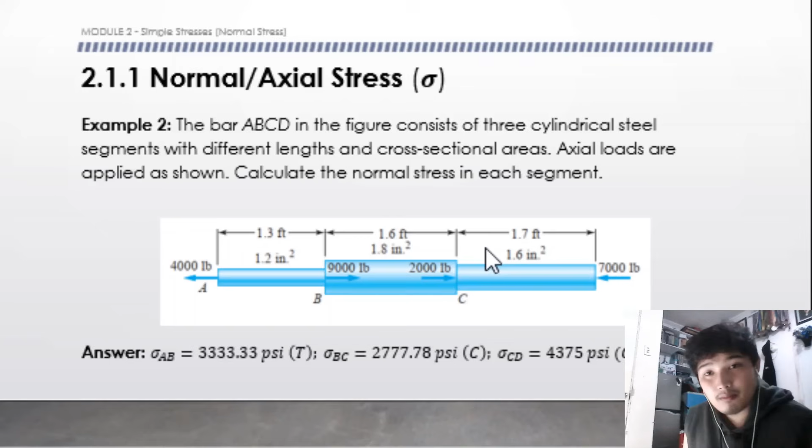Hi guys! So last time, we solved this problem using two possible solutions. The first is by cutting a section per segment, and the second is using the axial force diagram. So for the next problem, let's utilize the alternative solution, the axial force diagram.

Problem number 3. The cross-sectional area of bar ABCD is 600 mm squared. Determine the maximum normal stress in the bar.

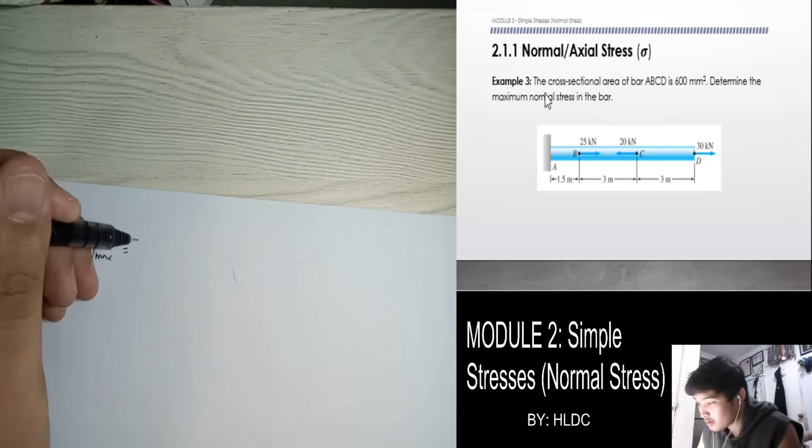Take note that the formula for normal stress is just force over area. Since at every cutting section the area is the same, that area is constant. So when does this normal stress become maximum? It's when we find the maximum normal force, given that the area is constant based on the problem.

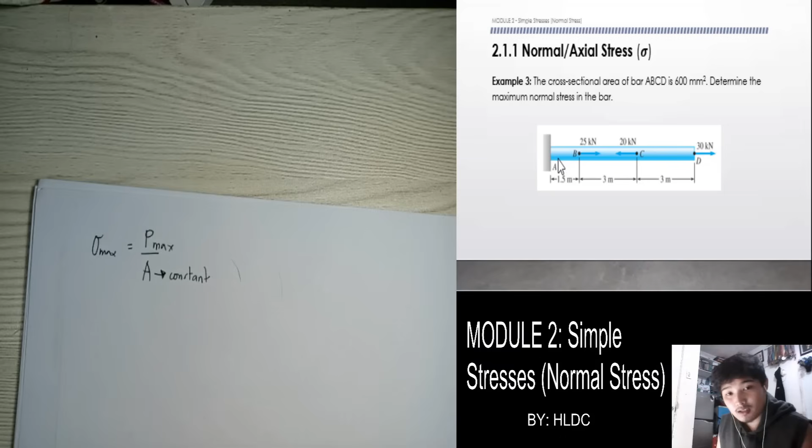So this is fixed. And then at B, there's 25.

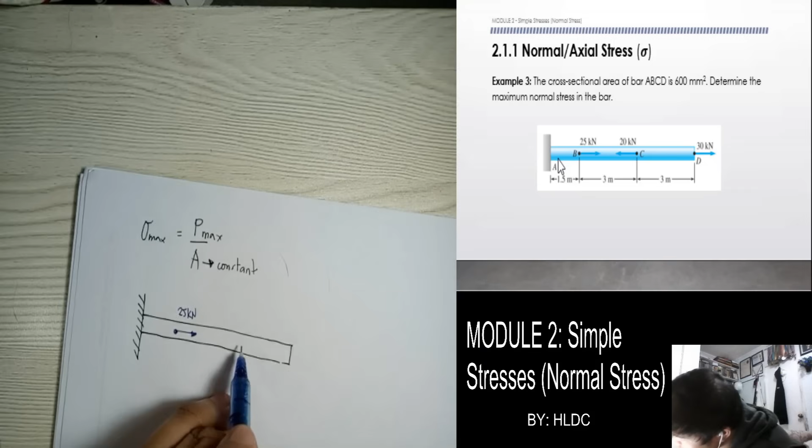Okay, so that's the given. The lengths there aren't too important since they're not part of our formula. Anyway, this is A, B, C, D. So our aim, class, is to locate this maximum force.

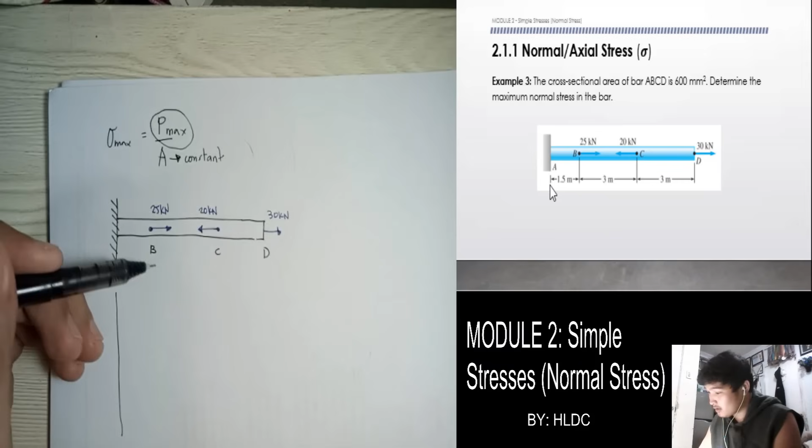So how do we use the axial force diagram again? We create a vertical line at every point where there are external forces, and then we create a horizontal line, our neutral line, at 0.

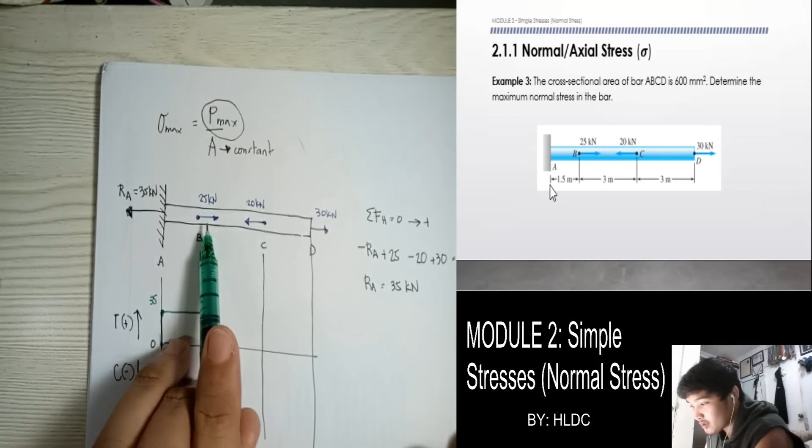From A to B, there's no force, so it's constant. Then at B, there's a 25 kN force, which is opposite to our first tension force going up, so this one goes down since it's the opposite direction. So from 35, it goes down by 25, which is 35 minus 25, that is 10.

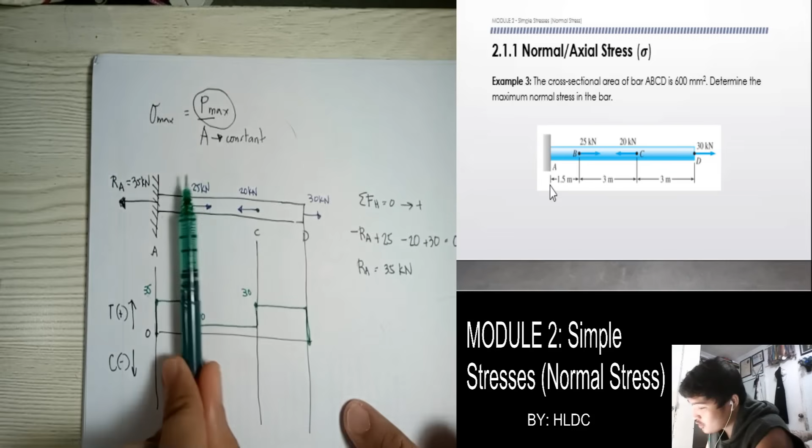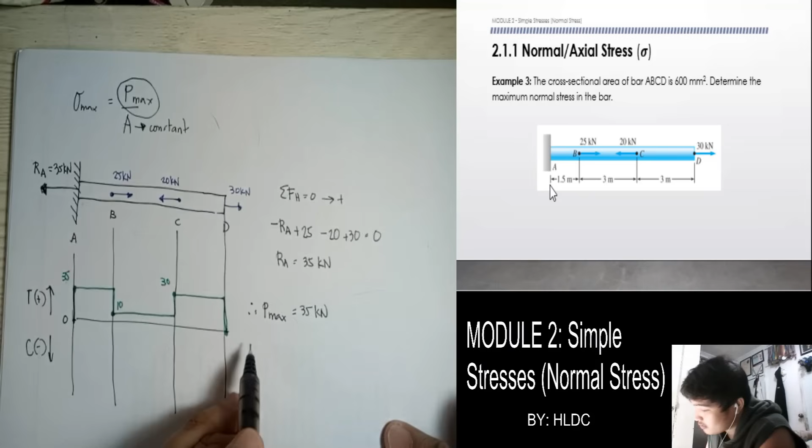Yeah, that is using the axial force diagram.

So what's being asked is the maximum normal stress. So solving for max stress, P max over the constant area, that is 35 — I'll make it 35,000 Newton so the final answer is in MPa — over area.

What's the area of the bar? 600 mm squared. So therefore the answer is 58.33. The unit is Newton per mm squared, so that is MPa. That's the final answer.

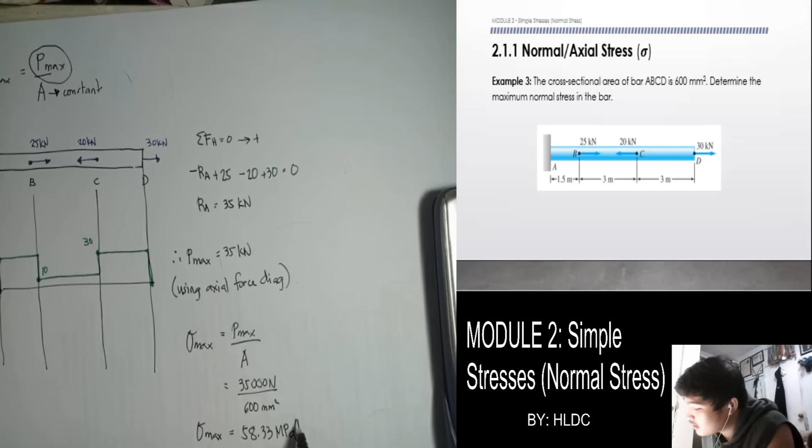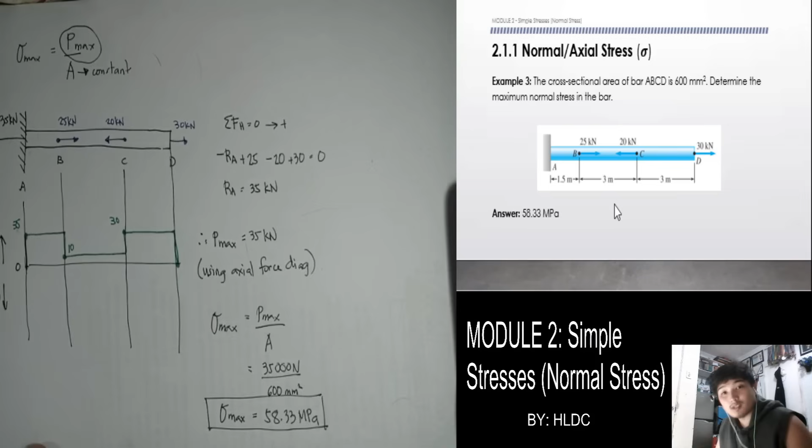Okay, let's check it. Okay, so it's correct. Next.

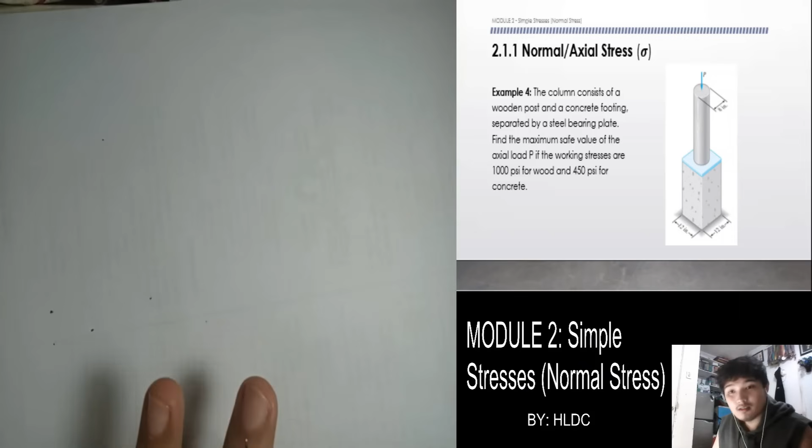Sabi dito, the column consists of a wooden post and a concrete footing separated by a steel bearing plate. Find the maximum safe value of axial load P if the working stresses are 1000 psi for wood and 450 psi for concrete.

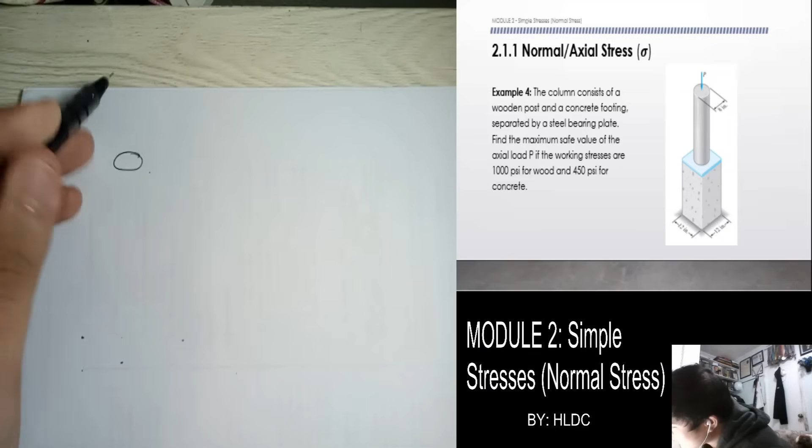Tinatanong ko ano daw yung kayang i-carry lang na load P, combined system na to ng wood sa concrete.

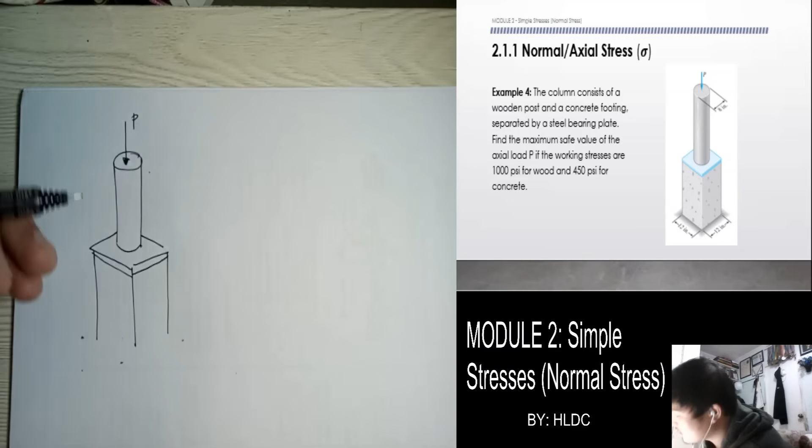So andito yung force P na hinahanap. And then given ang dimension, ito is diameter is 8 inch. Dito naman is 12 inch by 12 inch.

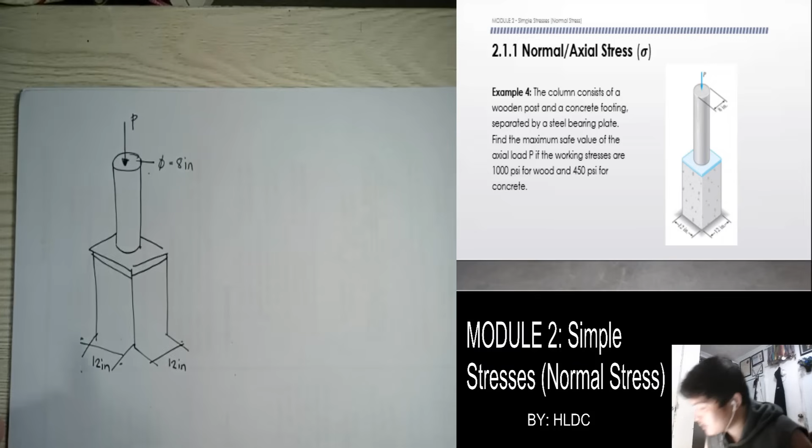Tapos given din yung mga allowable stresses nila or working stresses. So itong wood, ang limiting stress niya is 1,000. And then itong concrete, 450.

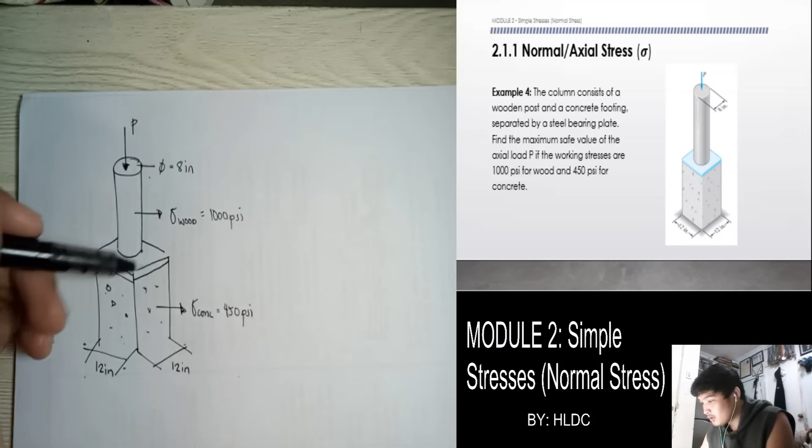Okay, so pag tinignan natin yung figure dito, kung ano yung force P na i-carry ng wood, yun din yung force P na matatransfer dito sa concrete. So, ang gawin natin class, kunin natin yung limiting force na kayang i-carry ng wood, tapos kunin natin yung limiting force na kayang i-carry ng concrete.

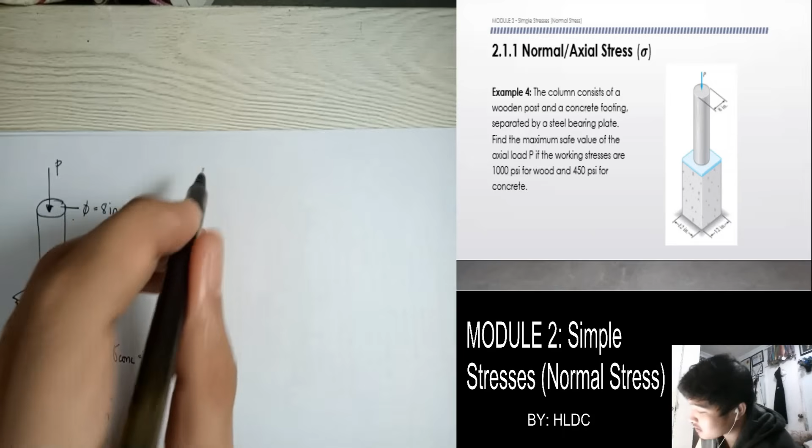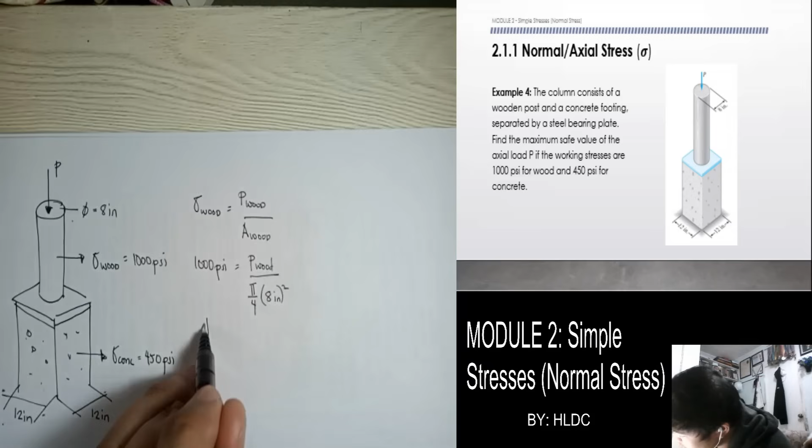To do that, gamit lang tayo ng formula ng normal stress. That normal stress for wood equals sa P ng wood over area ng wood. That is 1000 PSI, so kung PSI unit, dapat ito is pound over inch squared. So P wood over the area niya, 8 inch, so that is pi over 4 times d squared, 8 inch squared. So yung P na kaya lang i-carry ng wood is what?

So sagot is 50,265.48 pounds. Hanggang dyan lang kaya ng wood na carry na P.

How about naman si concrete? Stress concrete equals sa P concrete over area naman ng concrete. Yung limiting stress naman niya is 450 equals P over area naman ng concrete, yung 12 inch by 12 inch. So ang kayang i-carry ng concrete na force P is...

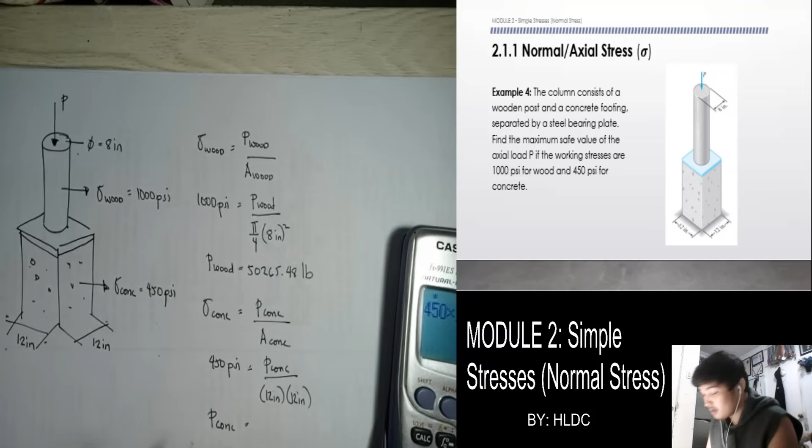Ayan, ang sagot is 64,800 pounds. Okay, so ang tinatanong dito class is yung maximum P, or safe P, I mean.

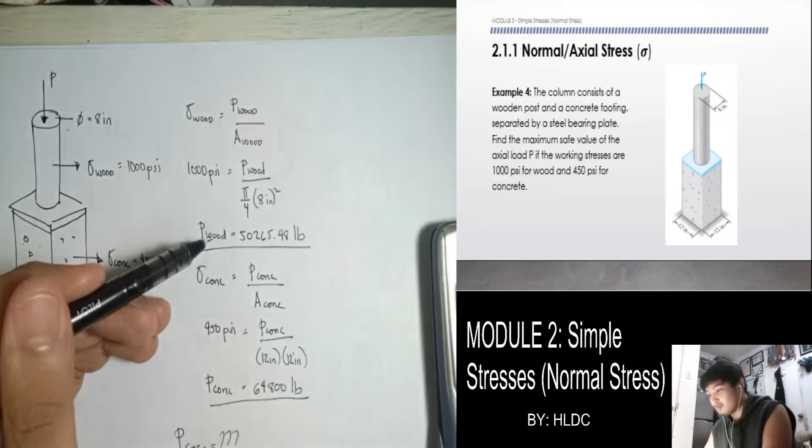So P safe. Okay, yun yung tinatanong. So sino ba yun? Yung sa dalawa, ito kasi kayang i-carry ng wood, ito naman yung kayang i-carry ng concrete. Ang tinatanong is P safe. So technically, pag sinabi mong safe, ibig sabihin dapat yung system mo hindi siya mag-fail kapag ilagay mo yung force P na yun. So para maging safe siya, dapat yung pipiliin natin yung pinakamaliit dito sa dalawa.

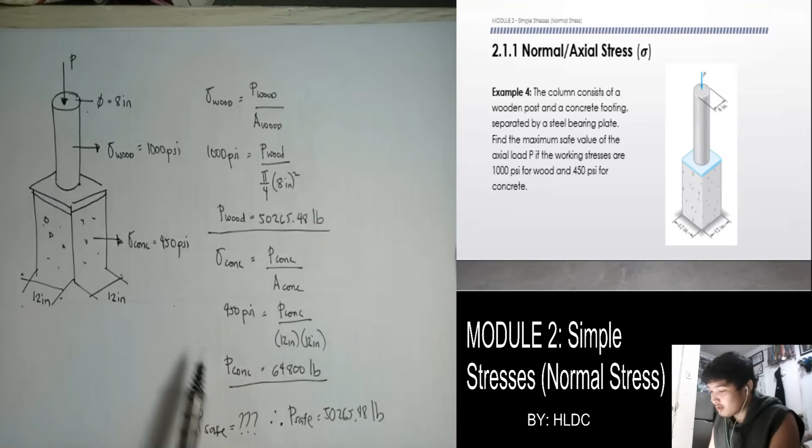Okay, so therefore, P safe equals 50,265.48. Para mangyari, kung ito pipiliin natin, yung wood, ma-attain niya lang yung maximum allowable stress niya na 1,000. Tapos ito, hindi siya aabot dito kasi hanggang 64,000 yung kaya niyang i-carry. 50 lang yung pinadala natin.

So hindi magpifail yung system. So ito na yung sagot. Madali lang siya. Next.

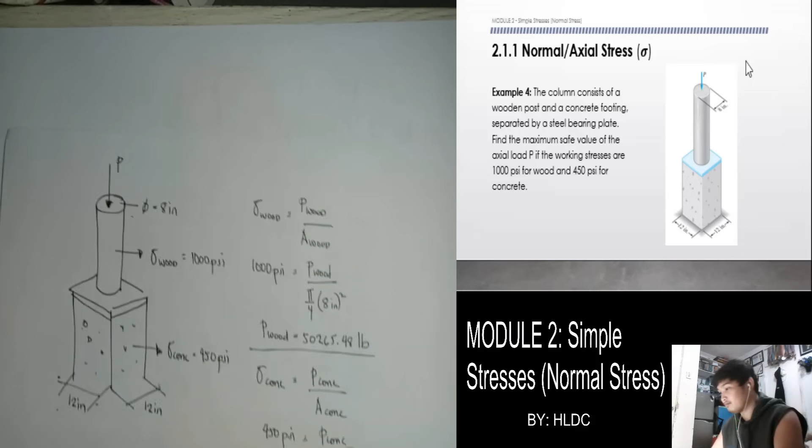Ayan, so tama. Sagot 50265. Next.

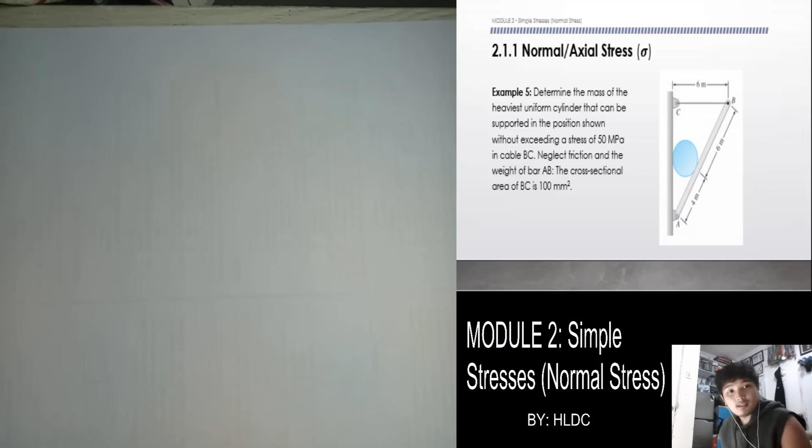Determine the mass of the heaviest uniform cylinder that can be supported in the position shown without exceeding a stress of 50 MPa in cable BC. Neglect friction and the weight of the bar AB. The cross-sectional area of BC is 100.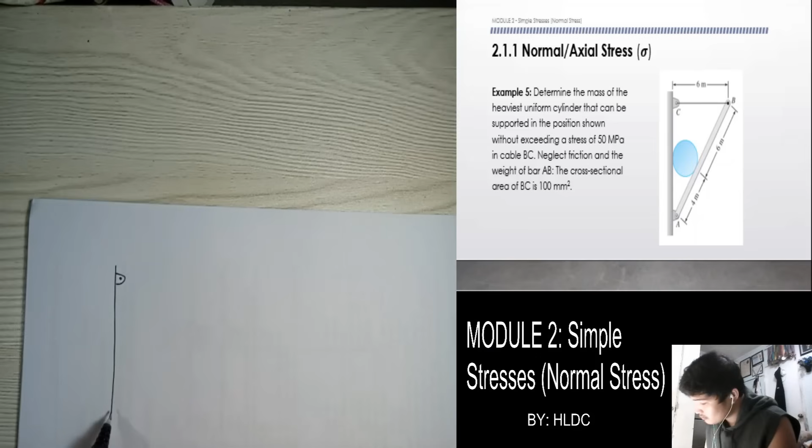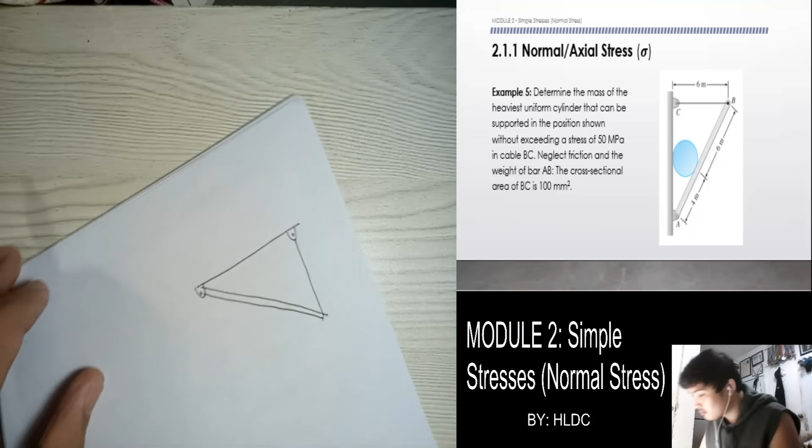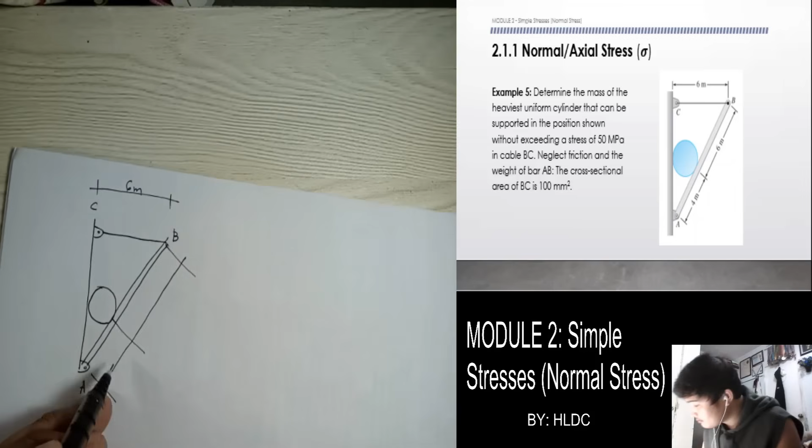So medyo mahirap tong problem na to, pero anyways, drawing muna natin. Kasi dito yung bola. Okay, siguro pwede na yung ganyan.

Ngayon class, ang given sa atin is yung stress limit ng cable BC. Ito yung cable BC. Alam natin class kapag sinabing cable, sa tension lang siya nagagamit, pero kapag compression hindi. So sure tayo na dapat mag-under tension to. Anyways, binigyan tayo nito, limiting stress equal siya sa 50 MPa. Okay, ano pang binigay?

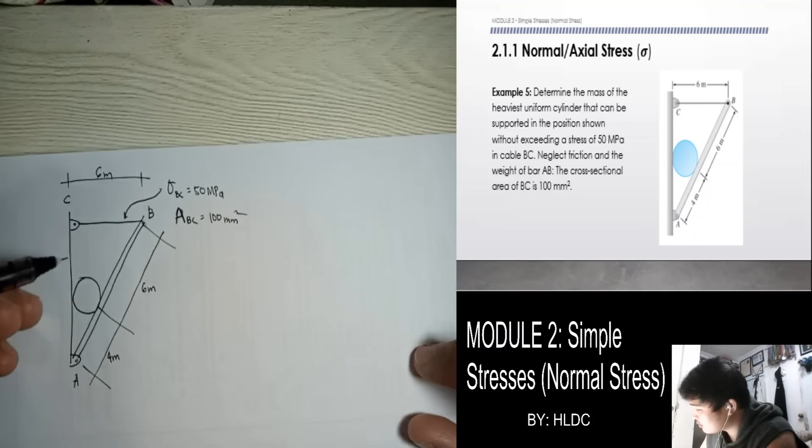Cross-sectional area. So area na yung binigay, area BC equals 100. So ang tinatanong class is ano daw itong weight ng heaviest cylinder na pwedeng ilagay dito without exceeding yung allowable ng cable BC.

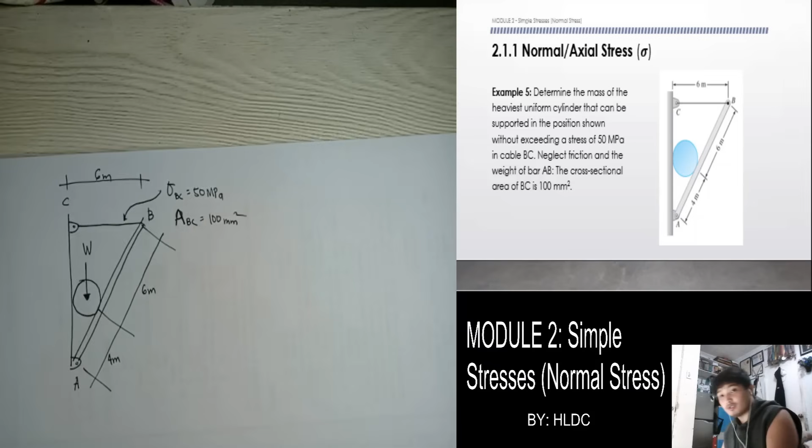Okay, neglect friction. So para masolve ito class, kailangan lang palabasin muna natin yung mga support reaction. Saan ba may mga reaction dito class? So dito may support reaction yan. Since nakapin-pin yan, meron diyang horizontal saka vertical components ng reaction. Anyway, assume na lang ako kasi hindi ko naman alam.

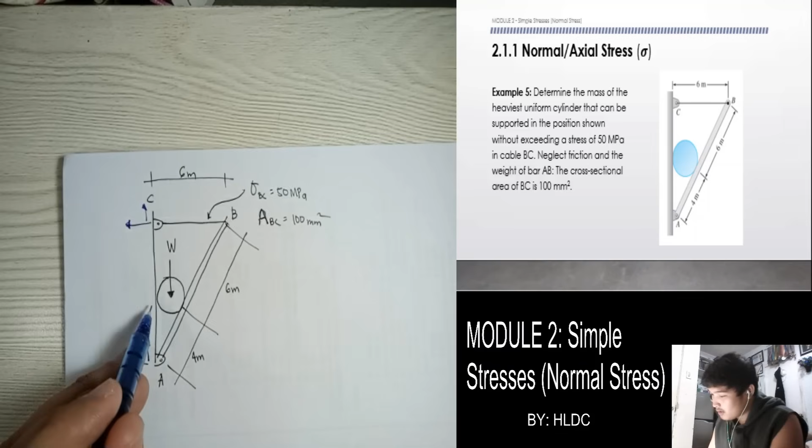So baka ganyan, as dito, ganyan din. Okay, yun lang ba yung reaction class? Hindi, kasi itong cylinder na to, since nagtatouch siya sa surface na to, and then without considering yung friction, therefore itong surface na to, nagre-react, diba? Nagbibigay rin siya ng support dito sa cylinder. So kung may weight dito, and then walang friction, so dito meron lang dito normal force na meron dito para masupport niya itong cylinder. So anyways, yung ganitong type ng problem is best na nasosolve using yung isolation or yung paggamit ng free body diagram.

Analyze natin siya member by member para masolve natin itong W. Okay, siguro pwede ko siyang simulan using yung analysis netong cylinder na to. I-isolate natin yung cylinder. So for cylinder, isolate natin siya and then kunin natin yung mga forces acting dun sa cylinder. Okay, so sure tayo meron siyang weight W and then acted upon by a normal force doon sa surface.

Okay so yun lang ba yung mga forces na meron dito na nag-act sa cylinder? Kasi kung yan lang yan, in-isolate natin, di ba? So dapat hindi siya, or nasa state pa rin siya ng equilibrium. Kaya kung yan lang yung forces, edi malalaglag yan, tama ba? So dapat meron nagsusupport na vertical force dito. At saan nanggagaling yan? Bakit hindi siya malalaglag?

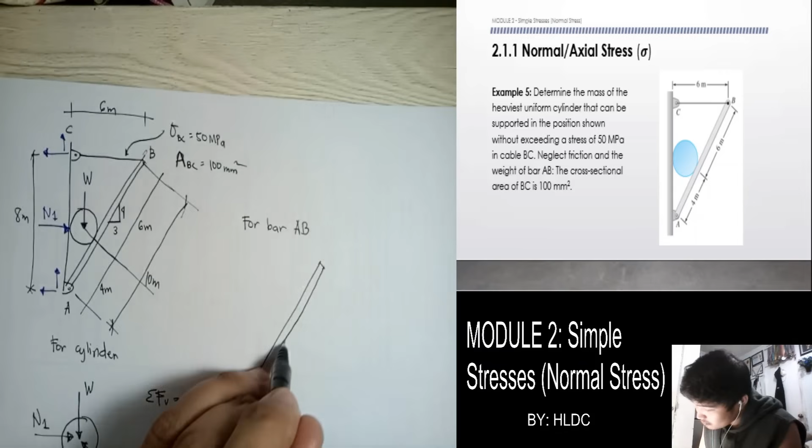Okay so kung yung normal force dito is towards doon sa cylinder, pagdating dito sa bar AB, towards naman siya doon sa bar AB. Okay pero yung distance niya is 4 pa rin by 6. Tapos ito is N2, which is equal, pwedeng i-rewrite using 5/3 of W.

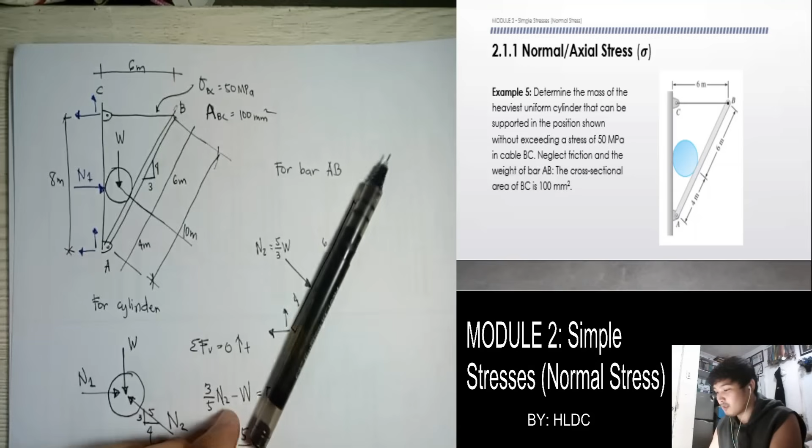Okay ngayon kung may normal force dyan, edi malalaglag yung bar AB, diba? So therefore dapat may mga magre-resist yun. Edi yun nandito dito, diba? Meron ditong support reaction na ang assumption ko is pa ganito. So kung malalaglag pa rin yung class, imagine mo, kahit may support reaction ka dito, kung may force, malalaglag, diba?

So therefore dapat yung B meron din siyang reaction. Saan manggagaling yung reaction sa B? Edi galing dito sa cable. So dahil pag ganito yung moment na ibibigay nitong normal force na to, dito magre-resist siya along doon sa inclination ng cable. Since horizontal yung cable, horizontal din dapat itong force dito. So ito na ngayon yung force due to cable

BC. Okay so makikita mo dito class merong dalawang unknown, yung W sa PBC. But take note class, di ba ang gusto natin i-maximize yung W, di ba? Pinakamabigat. So para makuha natin yung pinakamabigat, edi i-maximize rin natin yung force ng BC. Kunin natin yung limiting force niya. So paano kukunin yung limiting force niya? Edi gamitin natin itong given sa kanya, yung allowable stress niya, pati yung area.

Okay so for PBC, gagamitin natin yung formula ng normal stress. So stress BC equals PBC over area BC. So given ito, limited siya hanggang 50 MPa lang. PBC is unknown, area is given 100 mm squared. So MPa mm squared, so sure tayo dapat Newton ang sagot dito. So that PBC is equal to 5,000 Newton. So ibig sabihin, yung maximum na kayang i-carry ng cable, using the allowable stress, is 5,000 Newton.

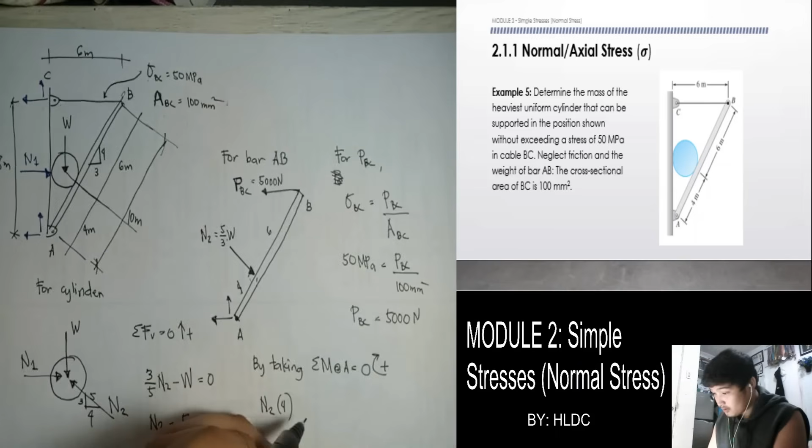Okay, and then ito counterclockwise, minus P BC naman. Tapos, yung moment arm naman niya is yung perpendicular dito, di ba? So, project natin, extend natin to. So, ito yung perpendicular. Ilan ba tong height na to? Diba, yan yung 8. So, moment arm is 8.

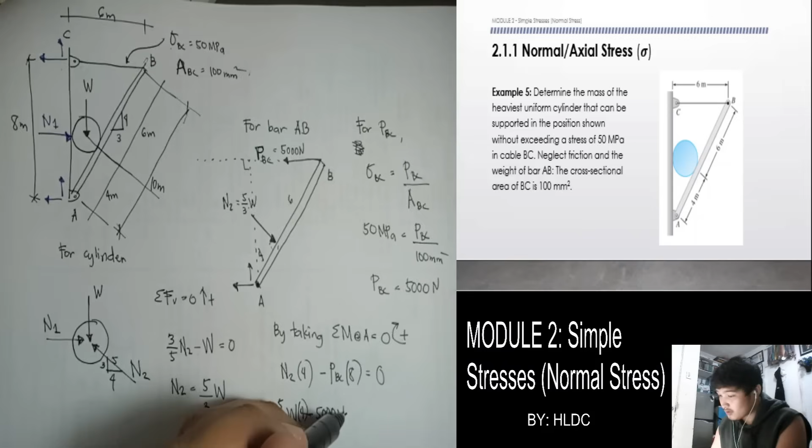Equals 0. So, N2 rewrite natin using in terms of W. So, that is 5/3 of W minus PBC is ito, 5,000 newtons, kulang to 4 minus 5,000 newtons times 8 equals 0. So, therefore, solvable na yung W.

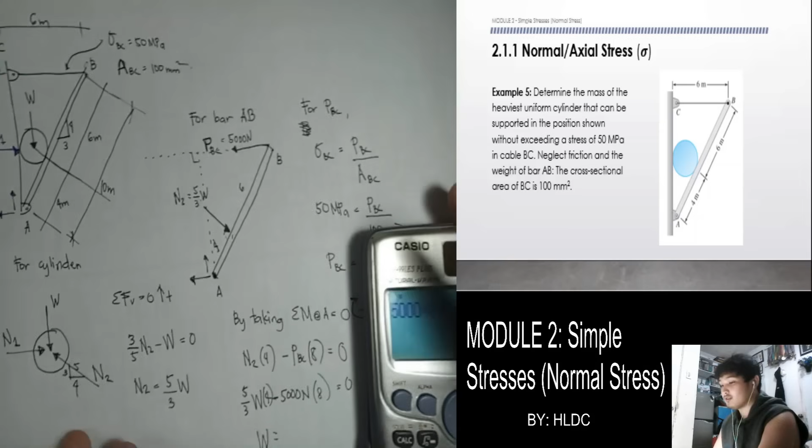Ilan ngayon yung W dito, class? W equals, ayan, so sagot is 6,000.

Newtons. Pero ang tinatanong, determine the mass of the heaviest. So therefore, convert natin siya into mass. So that weight is equal to mg. And then 6,000 newtons is equal to m times 9.81 meters per second squared. So mass of the heavy cylinder equals, so sagot is 611.62 kilograms.

Okay, so medyo mahaba yung solution niyan. Pero karamihan doon class puro statics, no, which is I presume dapat master mo na. Okay.

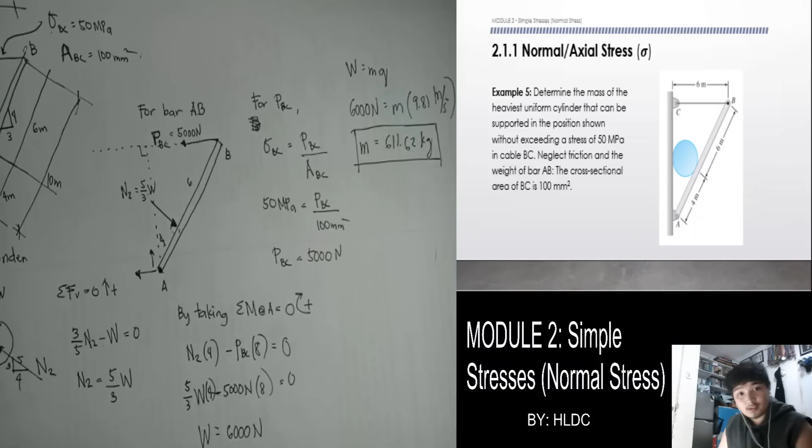So next. Ayan, so tama yung sagot. So next.

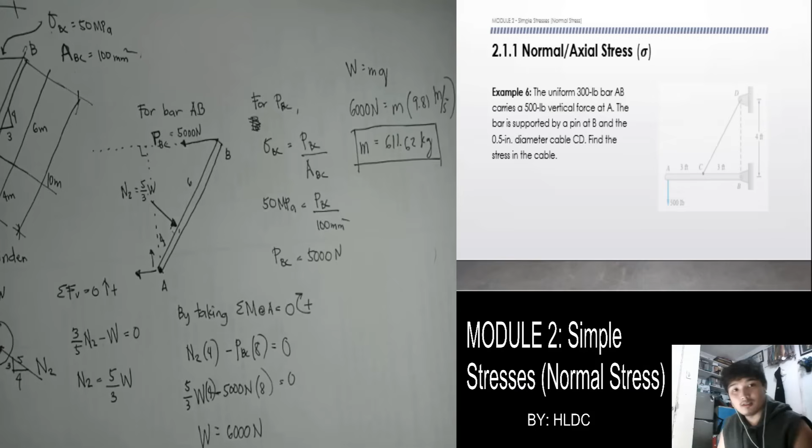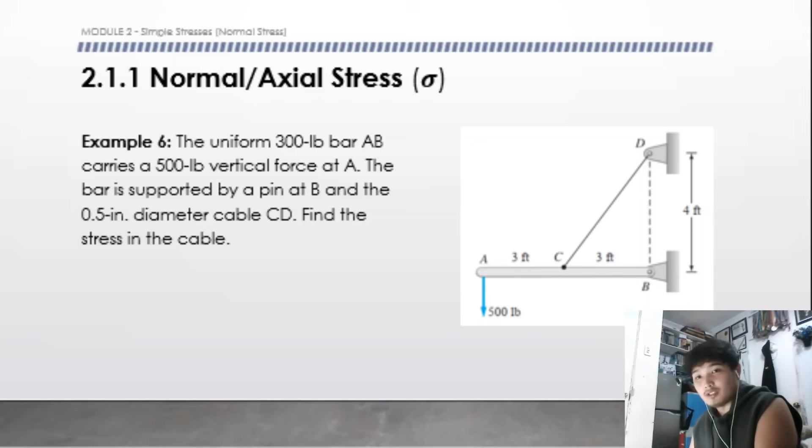And example number 6. The uniform 300-pound bar AB carries a 500 lb vertical force at A. The bar is supported by a pin at B and the 0.5-inch diameter cable CD. Find the stress in the cable. Okay, so ito class, medyo madali na to.

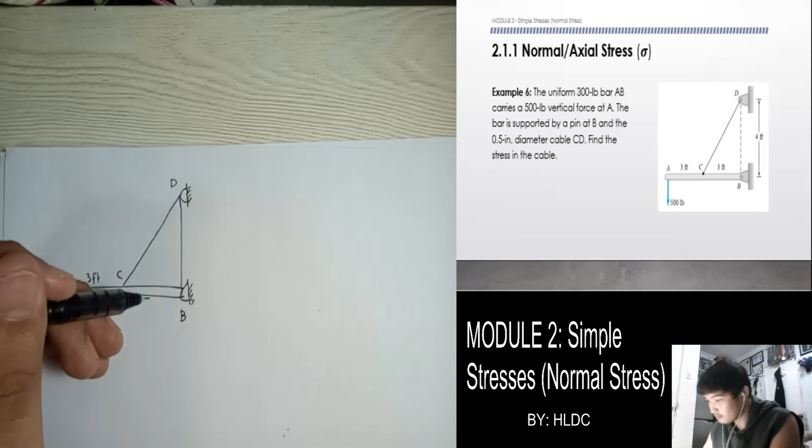Okay, so ayan yung figure class. So, sabi daw yung bar AB na may 300 lb. So, therefore, meron siyang weight pa, no? So, saan ba nakalagay yung weight? Iba lagi sa centroid yun. So, kung 6 feet yan, hindi dito yung weight ng bar.

Weight is equal to 300 lb. Tapos, carries 500 lb dun sa A. So, tinatanong ano daw yung stress sa cable CD. Ito yung cable CD. So, tinatanong, ano yung stress?

So, di ba kapag cable, mga tensile forces lang kinukuha nyo. So, that's normal stress. Normal stress at CD. Okay, so para malaman natin yung normal stress dyan, di ano yung kailangan class? Kailangan yung area, tapos kailangan din yung force carried by nung cable.

Okay. So, ano ba yung may given pa kasi? 0.5. So, given yung diameter pala niya class. So, diameter ng CD equals 0.5 inch. So, pwede na natin masolve yung area niya. Kailangan ko na lang yung force niya para masolve ko na itong CD.

So, paano makukuha yung force? Doon sa cable CD. Pwede ang gawin natin class, putulin natin si cable CD. Diba? Pag pinutol natin siya, lalabas yung internal force doon sa member CD. Okay, sa cable CD. So, putulin natin, tapos consider natin itong drawing sa baba.

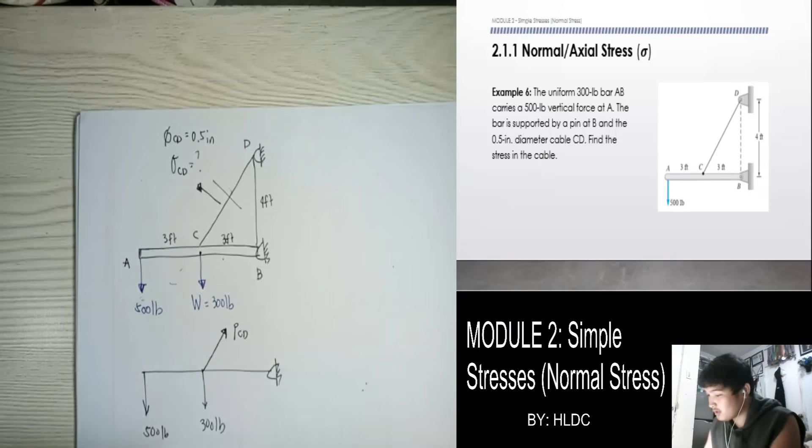Okay. Putulin natin, tapos consider natin itong drawing sa baba. So, ano mangyayari? Ganyan yan, dito. As dito, so, sure tayo tension yung force dyan, diba? Sa CD kasi cable yan. So, pag ganito siya, this one is P CD. Okay, 3 feet by 3 feet. So, paano makukuha yung class?

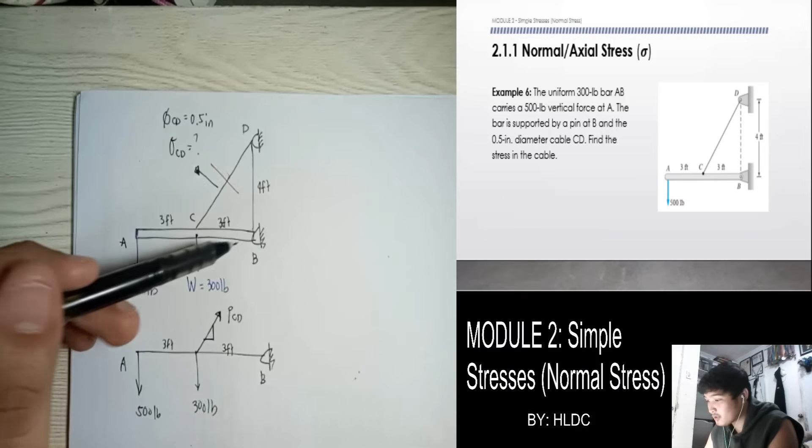Pwede mag-take tayo ng summation of moment sa B since hinge ito. Okay, so, moment dito 0. Okay, so kunin natin tong slope ng PCD. Anong slope nito? Di 4:3. So, 3, 4, 5 triangle ulit siya.

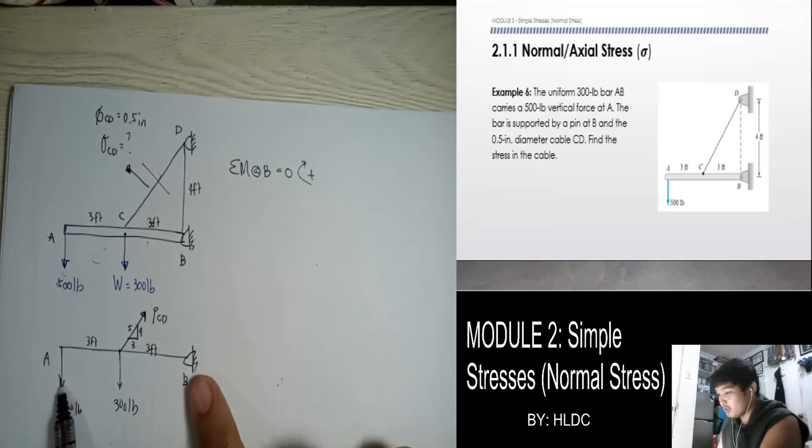Okay, so by taking summation of moment at B equals 0, considering clockwise moments positive. So, moment natin yung mga forces. So, unahin natin to si A. So, ano yung moment nito sa B? Counterclockwise, diba? So, counterclockwise moment. So, that is negative 500 LB times the moment arm with respect sa B is perpendicular yung 6.

And then ito, minus ulit counterclockwise minus 300 LB moment arm perpendicular yung 3. And then itong PCD, yung PCD na yan class is meron siyang pwede nating, kasi mahirap kunin yung moment arm niya with respect sa B kung incline siya, diba? So, kunan natin siya ng components, vertical component saka yung horizontal component niya. Okay. So, sino ba yung may moment arm sa B? Yung magkikreate ng moment. Di itong vertical. Ito wala, diba? Wala siyang moment arm.

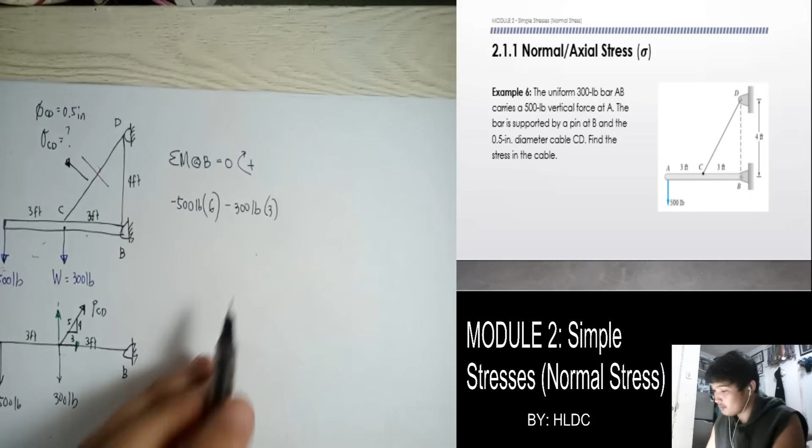So paano kunin itong vertical natin? So, anyways, yung moment pala nito is positive, no? So, that is, nakikita nyo ba? Ayan, so yung moment arm nito is clockwise, so positive. So, that is plus vertical component nitong PCD. So, that is what? 4/5. 4/5 na PCD, yung vertical component. And then, times yung moment arm niya, yung perpendicular is 3, equals 0. So, sa equation na to, yung PCD lang yung unknown. So, kaya natin isolve yung PCD.

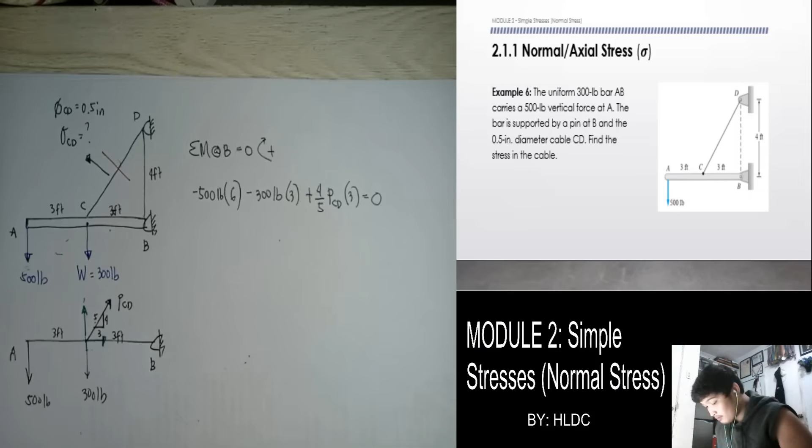So sagot is 1625. Check natin.

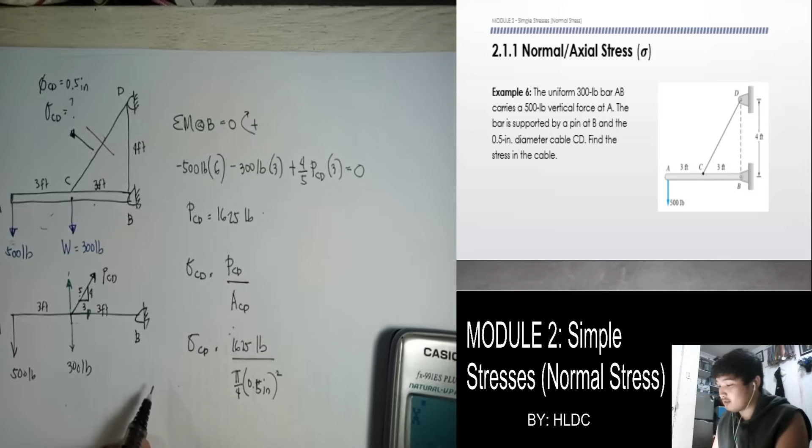1625 pounds. So yung PCD natin, natanong is stress. Okay, so basic na. That stress CD equals PCD over area CD. So that 1625 pounds per area is pi over 4 times the diameter 0.5 inch squared.

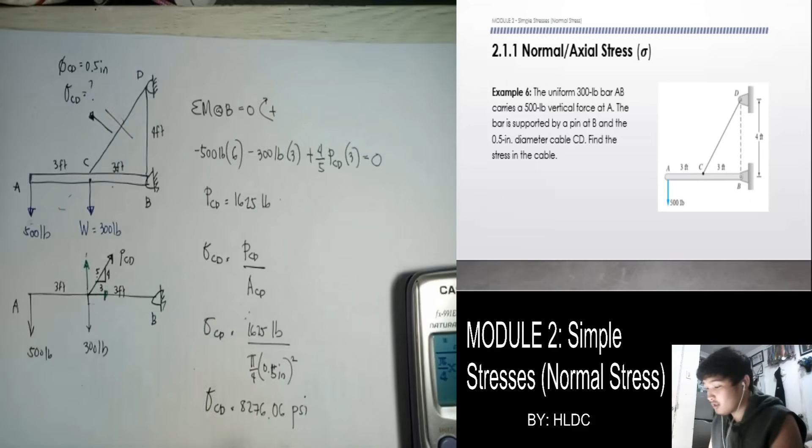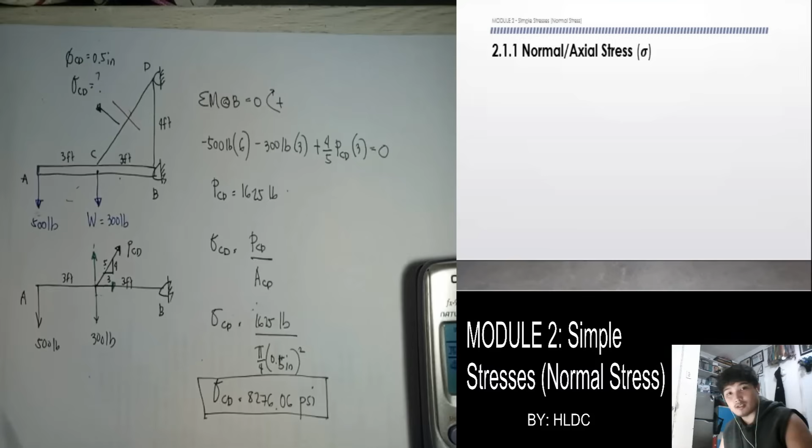So that stress CD equals... sagot is 8276.06 lb per inch square, so that is pound per square inch PSI. Okay, so ito na yung sagot. Check natin. Correct. Okay, so next.

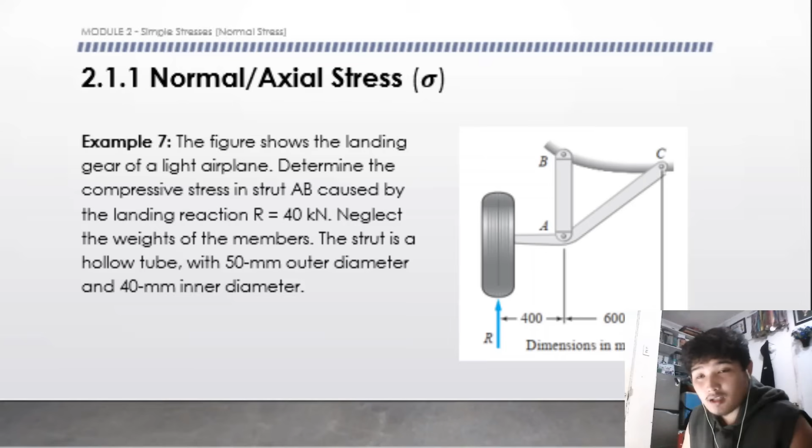Ayan, so sabi dito, the figure shows the landing gear of a light airplane. Determine the compressive stress in strut AB caused by the landing reaction R equals 40 kN. Neglect the weights of the members. The strut is a hollow tube with 50 mm outer diameter and 40 mm inner diameter.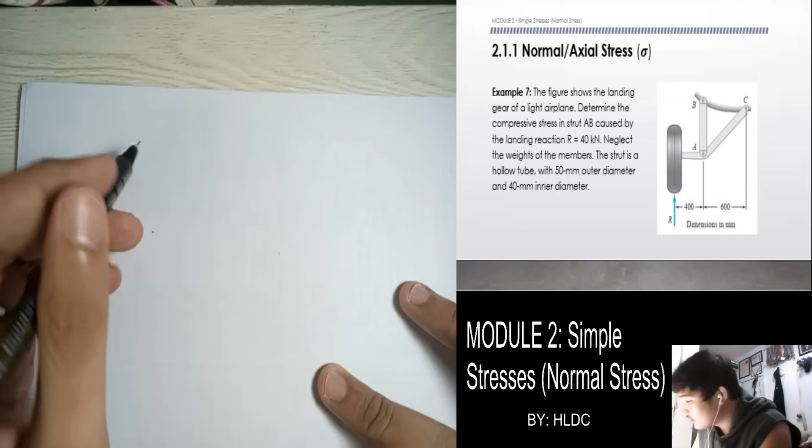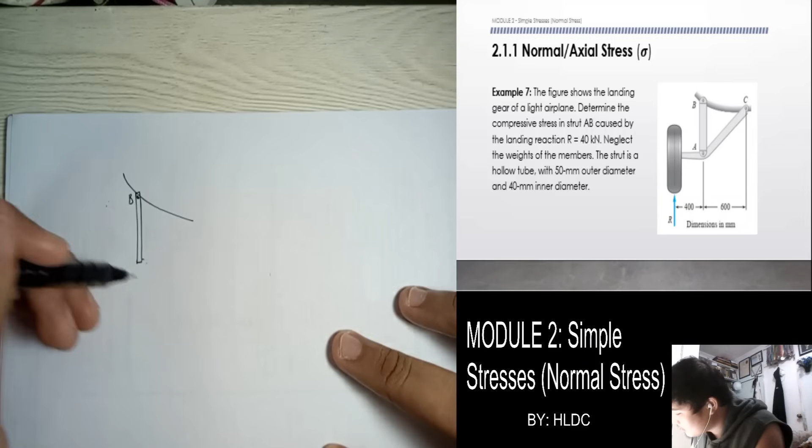So draw muna natin siya, class. So yung member AB is vertical member siya, di ba? Nandito yung reaction. So yung reaction is 40 kilonewtons, tapos given din yung mga horizontal distance.

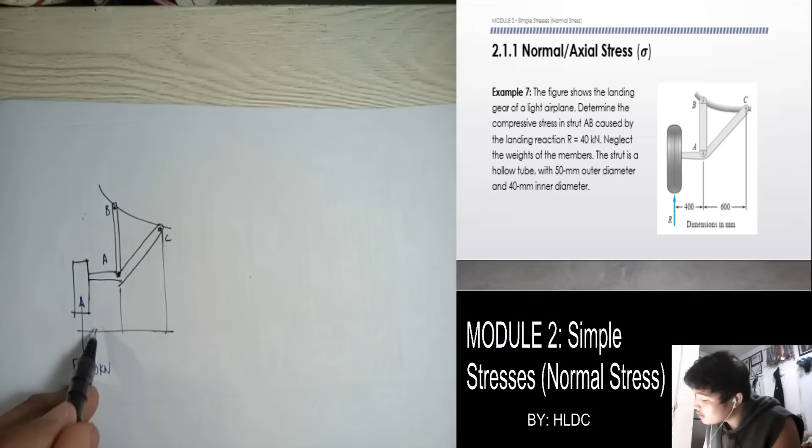400 sa 600. So anong tinatanong, class? So ang tinatanong is compressive stress in strut AB. So compressive stress, edi ibig sabihin normal stress yun, di ba? Tapos ito yung strut AB, so ito yung tinatanong. Normal stress at AB. So ganun lang ulit yung class.

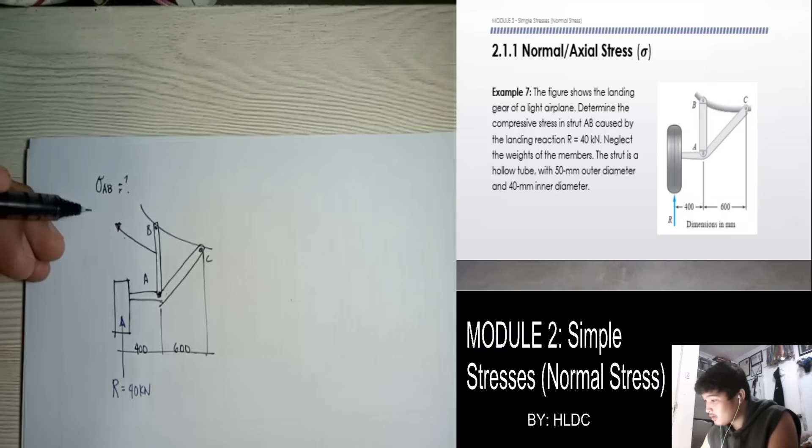Para malaman yung normal stress, kailangan mo yung force saka yung area. So yung area, class, given naman na yung dimension. So yung dimension, capital D, outer diameter 50 mm, and then small d, 40 mm. So yung kulang na lang dito, class, para ma-solve yung stress is yung force carried by strut AB.

So para makuha na natin yung internal force dyan, class, edi yung gawin natin, cut na natin yung strut AB. Cut natin. Tapos pili ka, class, if you consider din sa taas o yung sa baba. So yung pag sa taas mo kinonsider mo, wala kang masolve dyan, class, kasi dito may mga reaction din dito eh, tapos dito may reaction. Anyway, sa taas wala ka naman makukuha ang forces dyan, diba, na given. So therefore, consider natin yung ilalim.

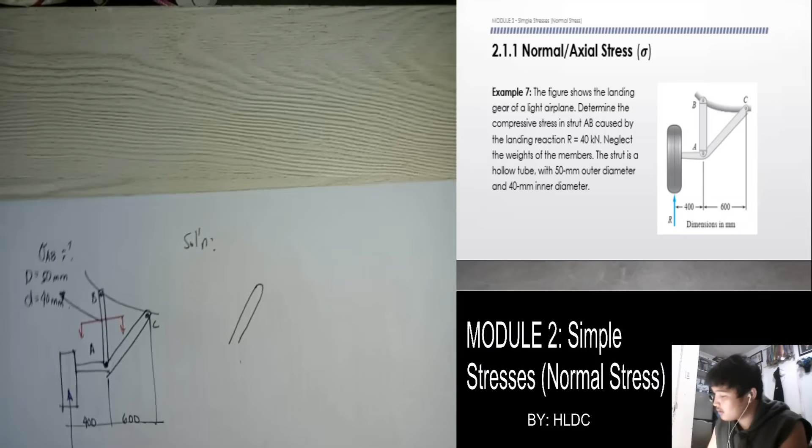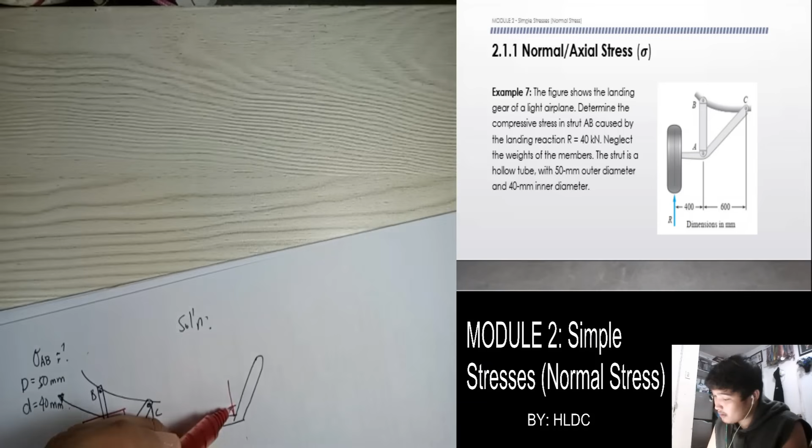So pag kinonsider natin, isolate natin to pag kinatlalabas yung force dyan. So solution, isolate natin. So kung sino lang yung naputol, siya lang yung lalabas yung internal force. So dito naputol siya, so lalabas dito yung internal force dun sa member AB. So tawagin ko siya PAB.

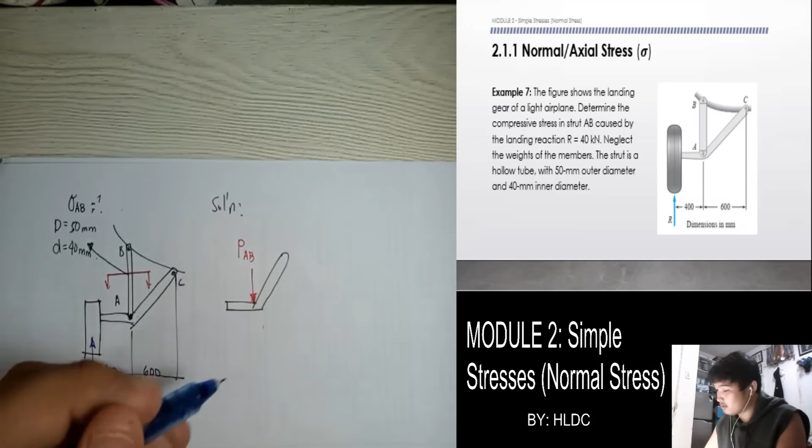And then so dito naman yung reaction, hindi ko na drawing tong R. Tapos ito hinge, and then ito C. Ayan, so dito sa C, meron din ditong reaction kasi support yan, di ba? So bahala na kung anong direction, wala naman akong paki dyan, class, masyado.

Anyways, ang goal natin, class, masolve itong PAB. So using this system, paano masolve yung PAB, class? So alam mo hinge to, di ba? So ang gawin natin, mag-take tayo ng summation of moment at C dun sa hinge na yun equals 0, considering clockwise moments positive.

So iikot ang dalawa, so clockwise itong reaction. So that R times yung moment arm niya is yung perpendicular sa C, diba? Kukunin natin yung projection ng force, perpendicular distance. So yung perpendicular distance niya is ito, yung 400 sa 600, so that is 1,000 clockwise. And then ito, counterclockwise.

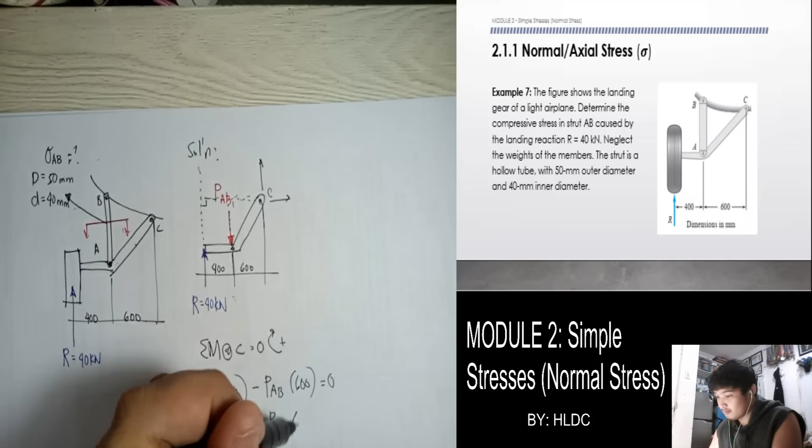So minus PAB, yung moment arm naman niya with respect sa C, so ito yung perpendicular, yung 600, equals 0. So given R is 40, ilan itong PAB? So sagot, 66.67. Anong unit? Kilonewtons. So pag may PAB ka na class, edi ready na tayong solve yung hinahanap, yung stress.

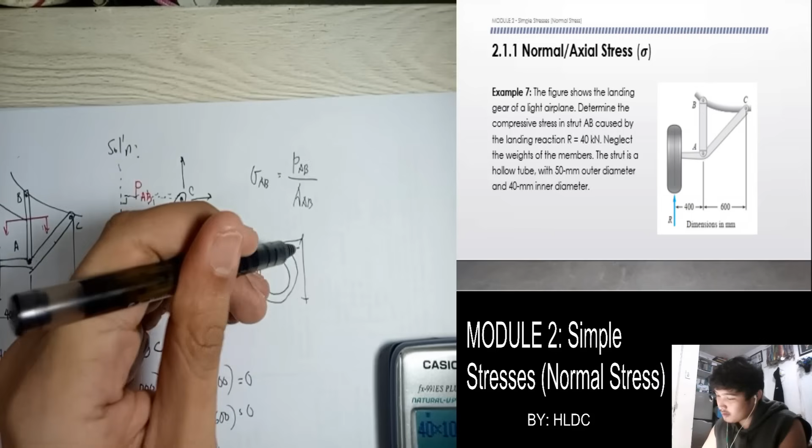So para makuha yung stress, stress AB equal yung PAB over area AB. So paano kukunin tong area ng AB? Di ba sabi hollow siya, class. So kapag hollow, ano nang ginagawa doon? Outer D, inner d, so di ba yung area niyan is outer minus inner. So that is pi over 4 times D squared minus d squared.

So solving for stress AB equal sa PAB. Ano yung PAB class? 66. So para maging Newton yung class, edi yan times 1,000. So pag hindi ako nag-round up class, ang sagot dito 66,666.67 newtons. So yun yung lalagay ko dito, over the area, pi over 4, 50 squared minus 40 squared. So stress AB equals...

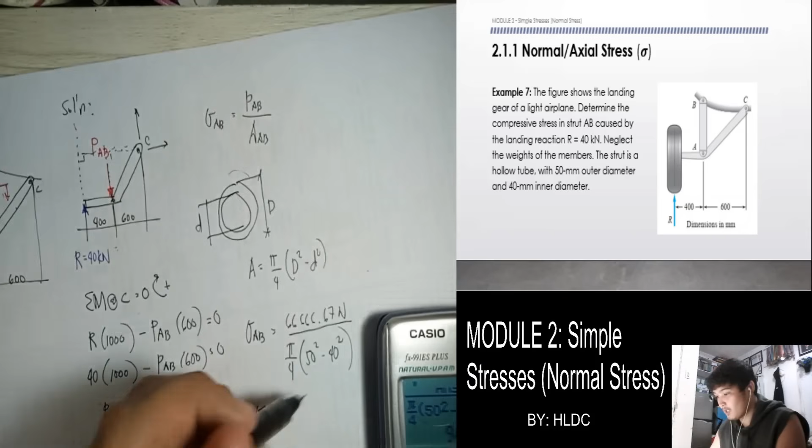94.31. So anong unit na ito class? Newton. Ito naka mm yan, di ba? Mm, so mm squared. So Newton per mm squared, that is MPa. So ito na yung final answer.

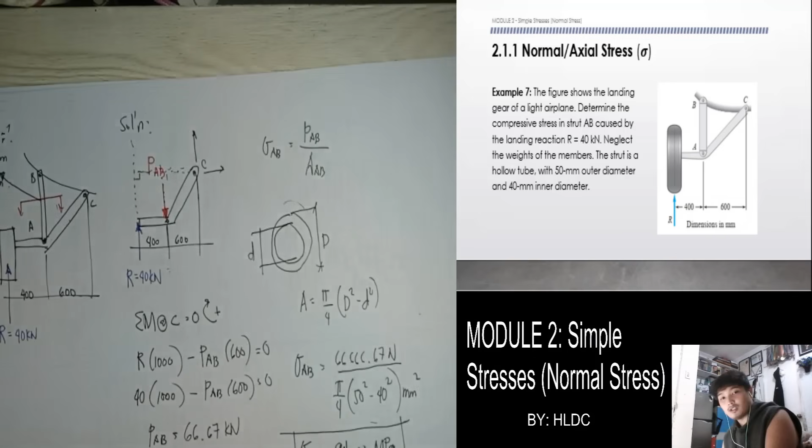Okay, so kung mapapansin mo ko sa strength of materials, meron siyang application ng statics para masolve yung forces. Tapos the rest ng formula, kadalasan madali na kasi force over area lang. Okay.

Next, ano pa lang sagot? Tama ba tayo? Ayun, 94.31. So hanggang dyan na lang muna class.